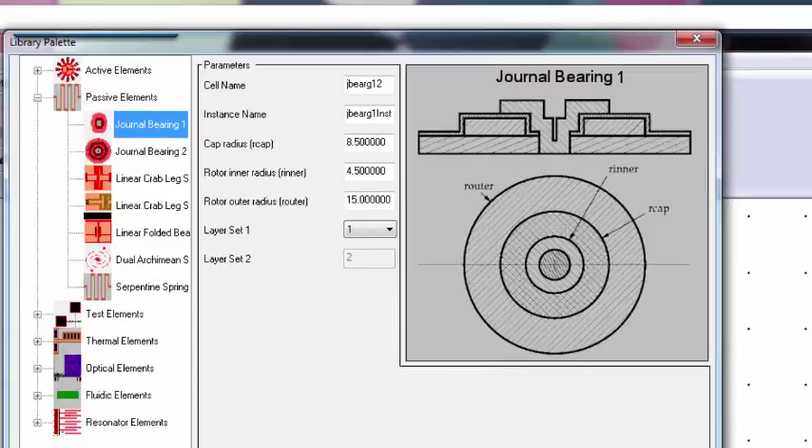So if I go to Library, I look at Library Palette, then I look at Passive Elements, and I click on that. The first thing in the Passive Element subdirectory of the Library Palette is the Journal Bearing 1. This is a basic bearing which works really well for this assignment.

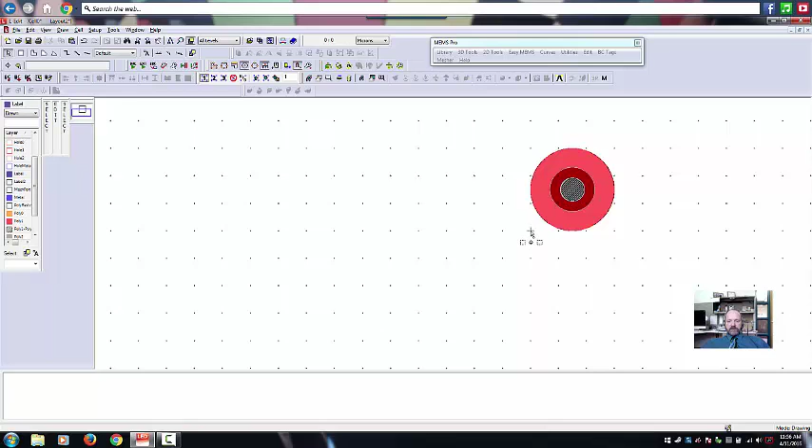So we go ahead and we insert it. We click as to where we want to put it. Close that box. And now you can see that the bearing is on your design. Okay. The only downside is it's not centered at 0, 0. So what I want to do is move this thing to 0, 0.

I'm going to drag it over. And I've turned Object Snap on and Center on. So that's how I could align the center of the hub to the 0, 0 point on my layout. Okay? So where is that, you might ask?

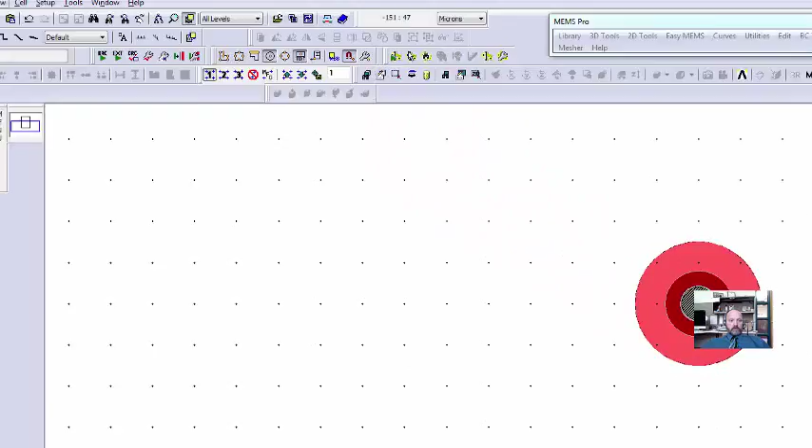Well, if you go to the Draw menu and you click on it, you can see that there is something called Object Snap. If I move over that, you can see the Enable Object Snap button has been checked and the center has been checked.

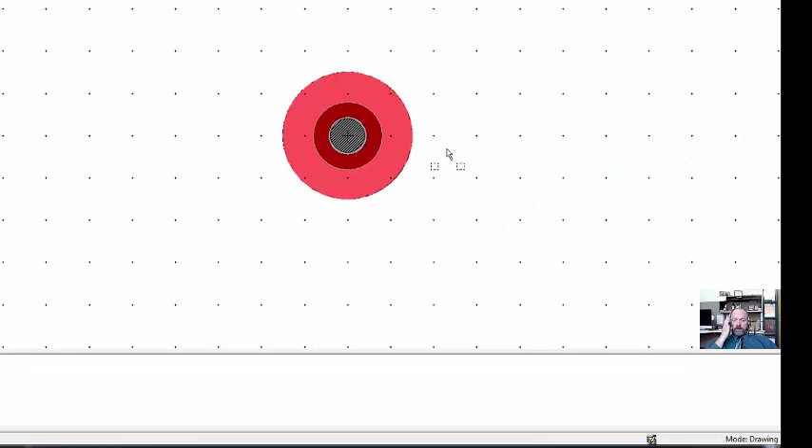Okay, you might want to line up the corners of a structure or the base of the structure, and then you can use midpoint or edge or vertex, quadrant. So there's different ways you can do Object Snap. Okay, so now I've centered it. So there's your hub.

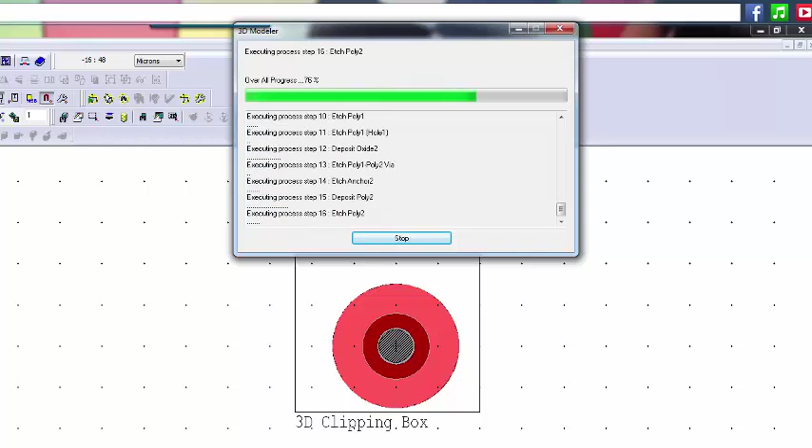Okay, and you can look at it. Go to 3D Tools. Okay, you can take a look at the 3D Tools and view it. Then you can cross-section it, look at it from the side view, and see how it's constructed. Since you didn't do it yourself, make sure it's at the right size and everything that you want.

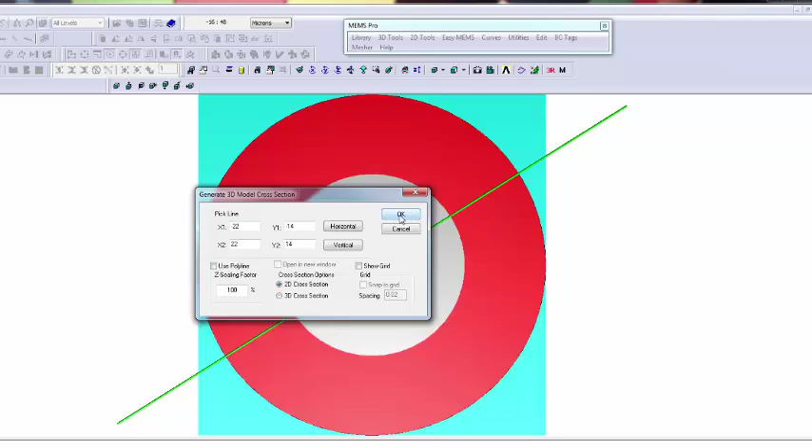Okay, so we'll go ahead and do that, and there it is. And if we go to this cross-sectional tool, it doesn't matter if we do it vertically or diagonally, since it's symmetric about an axis. So when we cross-section it, this is what our bearing looks like. Okay, so it's our basic hub, and it works really well. So now that's our hub.

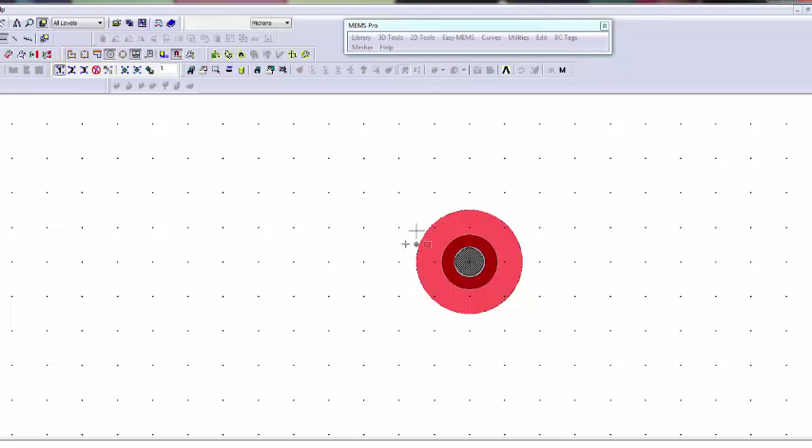Let's take a look real quick how big it is. You can use the rulers tool, and you can go ahead and see how wide this is. And it's 30 microns in diameter.

So if you're going to create another disk and merge it with this hub, if you're going to make like a Poly 1 structure, a Poly 1 gear, you'll use the Tori tool, and we'll do that in a minute, and center it about, again, 0, 0 with the correct radius. Okay, so you don't want to use a whole piece of Poly 1 that covers the center of the hub, because then it'll be obstructed and it won't work.

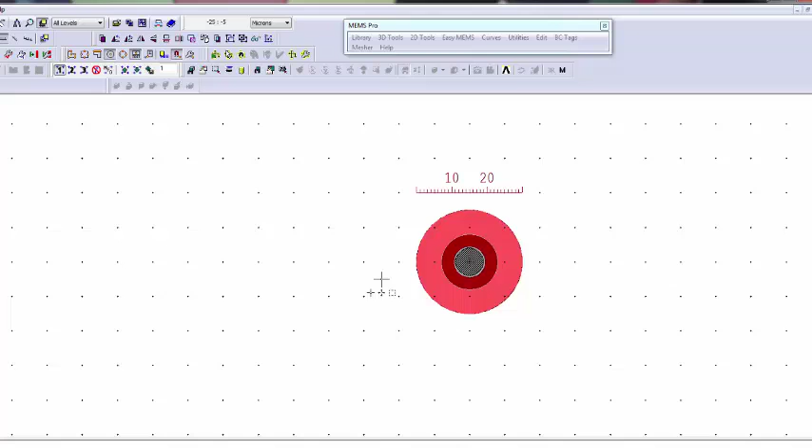So that's it for grabbing a hub off of the library palette and dropping it and centering it at 0, 0 to set yourself up to make the rest of the gear.